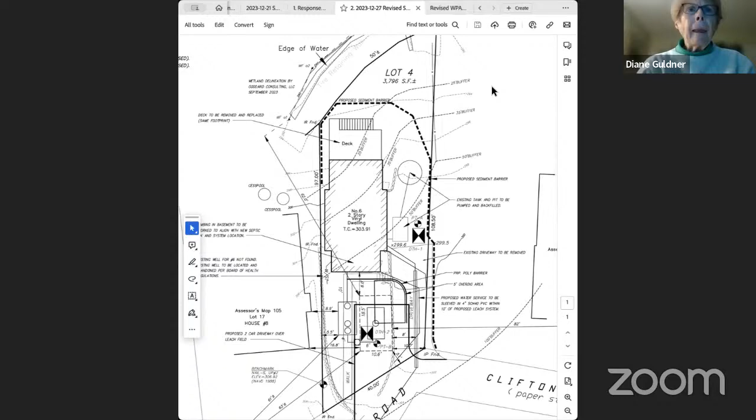Perfect. Okay, can everyone see the site plan on my screen? Oh, that's okay, a little bit big. Can you make it a little bit bigger? Yeah, that's bigger, that's big. Sorry, I'm trying to zoom back out, but I think my computer is, oh, there we go. Is that okay? I guess, yeah, we can live with that. Sorry, so I can kind of zoom in as I'm talking maybe.

So just to go over the proposed work, there's an existing deck in the back with a patio that extends about halfway underneath the deck that the applicant's requesting to replace all within the existing footprint, as well as get rid of the old, failed septic system and put a new one in the front. And then redo the driveway slightly.

So the existing driveway, if everyone can see my mouse, comes up along the property line here, over and down. They want to move it over to this bold line as they come up, over and down, just to create more parking space. This area will be converted back into lawn. And then some house renovations, but all within the existing footprint, exterior and interior stuff.

So the applicant requests an order of condition for the proposed work for the deck, the septic system, and the driveway and the house renovations.

Zoe, where's the driveway going to go? Is that right by the septic system? Yep, it's going to go right on top of it. So if you follow my mouse, I know it's hard to see, I thought I had a colored one, but it's this bold line that comes up, crosses over and down. Okay, yep.

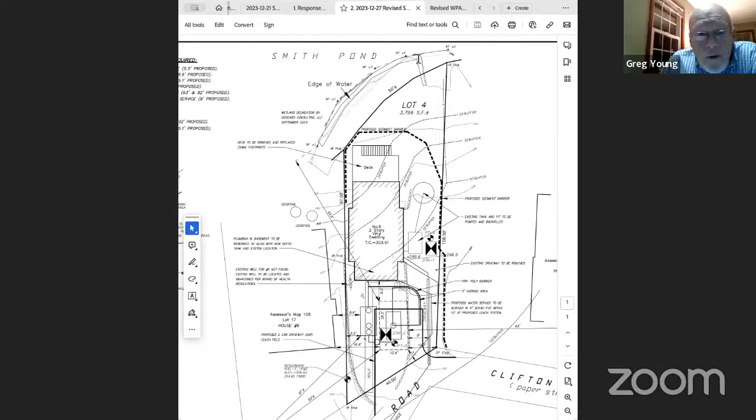Well, if I remember, the tires come back more than the edge of the water, Vinny. Those tires come back, there's a little gate down there, there's a little pathway down to a gate. Yeah, so it cuts in. I wonder if it's this, if you can see my mouse. I see it. I wonder if it's this icon, this drawing here, it does kind of turn up and along the side of that path.

I'm happy to pull up pictures if you'd like, I have some. Just to add in, I think that double line there is showing the tires, that's the actual line I assume Vito the engineer did for the tires. That's what I'm thinking too. Yeah, so that pretty much appropriately represents the extent of the tires.

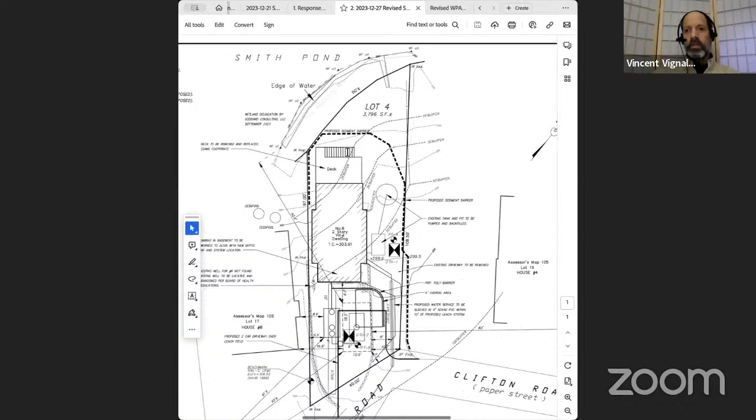There's a little chain link fence at the top of the tire wall, I think on the south side, I don't see the north arrow on here, but kind of the left side. Yeah, the southwest end, there is a chain link fence out there. And I know the plan shows the property line right there, so I wasn't sure at the last meeting, that was another question that came up. So I did a little research myself and checked the deed, and the deed says the property line goes to the edge of water.

So it appears to me that the line on the drawing is incorrect, and it should extend all the way to the edge of water, unless the edge of water has changed that much.

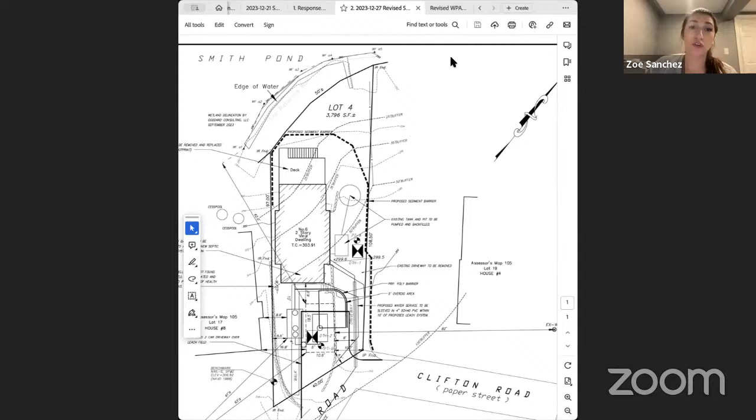Which would you mind pulling up that deed? Because I also read a deed earlier and I actually didn't see that. Maybe I missed it. I don't have it here, but I know I pulled it up. It's referenced in the assessor information, so I just went to that deed reference.

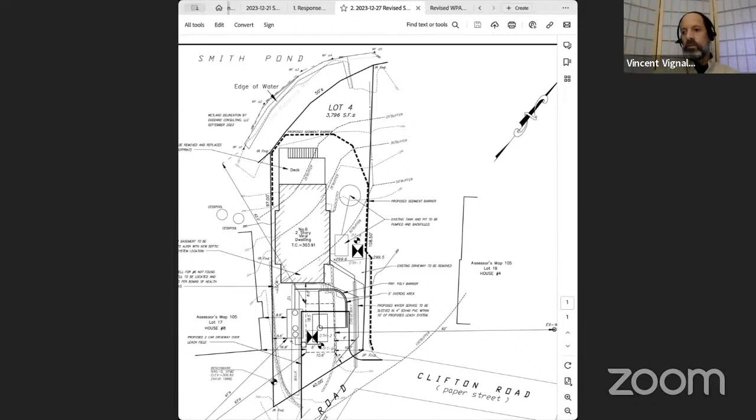Vinny, while you're doing that, here's a question too, Zoe. Do we know for sure that the tires are not further into the lot? Have we done any sort of soil testing, drilling down? Because I think the tires might be a little bit further back than just the retaining wall.

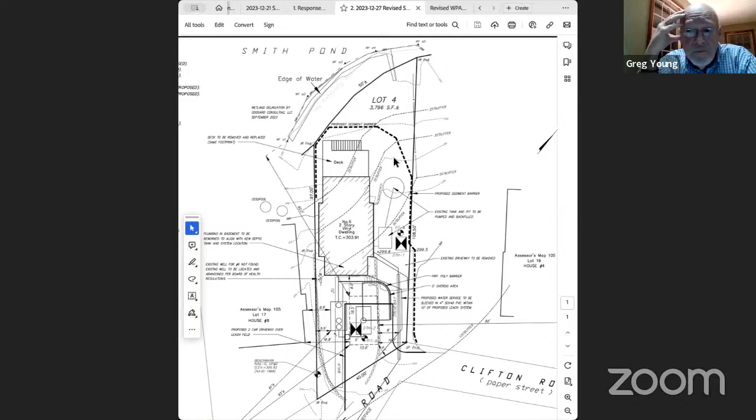I didn't do soil tests while I was out there, but I can pull up some pictures if it's helpful.

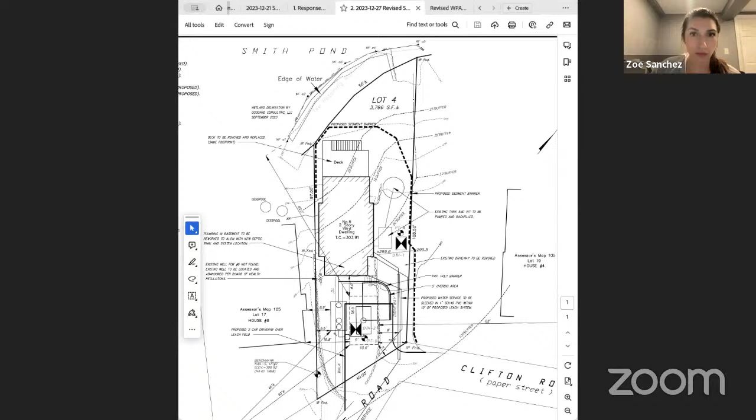Yes. All right, so this is what I saw when I was out there. So it's right along, basically right along the edge of the pond, a little bit, a couple feet in front of it. Kind of swings around, goes down over here, and then that's when it cuts in where that path is, like if you wanted to access the water.

But I've got a little sketch and some photos if you want me to share. Sure. It's coming.

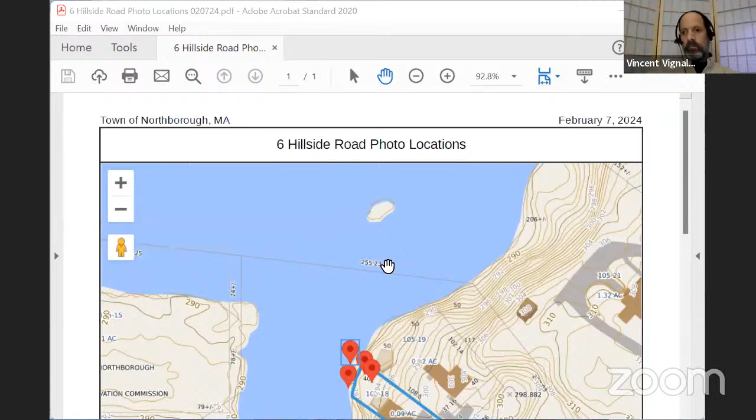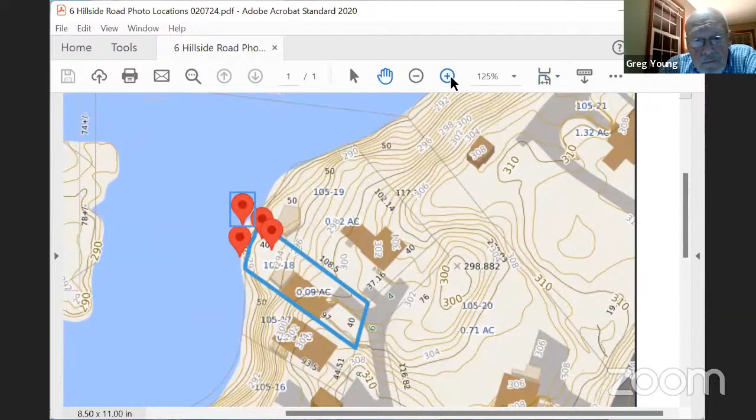So this is that same lot, and the pictures that are taken here, and around this side there. So now I'll try to get to the pictures. Got to go get them from the file at the office, so it takes a minute or two.

All right, so this is a picture. This is the, okay, what does it say? The north side. I think the gate is behind you here. It's behind us, yes. This is right where that gate comes down.

And you can see, I think my pointer is visible. You've got 1, 2, 3, and 4 layers. So you've got the pond level here, and then the tires are sitting just like that.

And then should be able to, okay. So the next photo is taken back a little bit with the gate, that there was an access road that's on the plan that shows going down in the upper right corner, goes down here, and then the tires kind of come around here and loop back along that ramp.

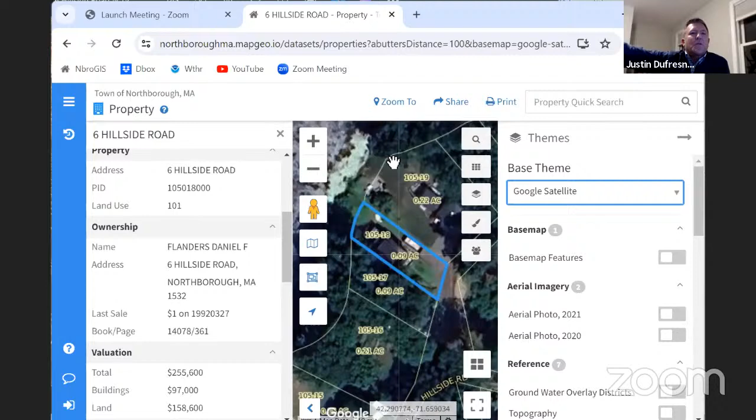Obviously there's a kind of man-made sluiceway over by Otis Street that allows the water to get through and down to the stream down there. There's man-made structures and things like that associated with it. I just don't know, would tires be any dirtier or worse to have there than something like that too? Yeah, I think that'd be something worth the applicant looking into.

Through the chair, if I may. Sure.

Thank you. So I just want to thank everyone, I really appreciate the comments. And I guess if more research is requested for this, it's up to the applicant to look into it. But I think at this time, looking at the overall project proposed through this notice of intent—overall improvement, redoing the septic system, the driveway, parts of the house and the back deck—overall it's a pretty simple, straightforward project. I would hate for this to bog down the main purpose of the project.

Maybe this could be treated as its own separate thing, where we can take care of what is proposed here and now. Then we can work with the applicant to encourage him to let us look into this for him and provide our help, and come forward maybe in the future to do something with this if necessary. I do want to mention that when DEP issued the file number, there were no comments left on that, so I don't have much information on exactly what they're saying. So yes, of course more research could be done on this. But again, I just want to reiterate that we're looking to focus on the proposed project and hopefully see an overall improvement on the site with what we have in front of us.

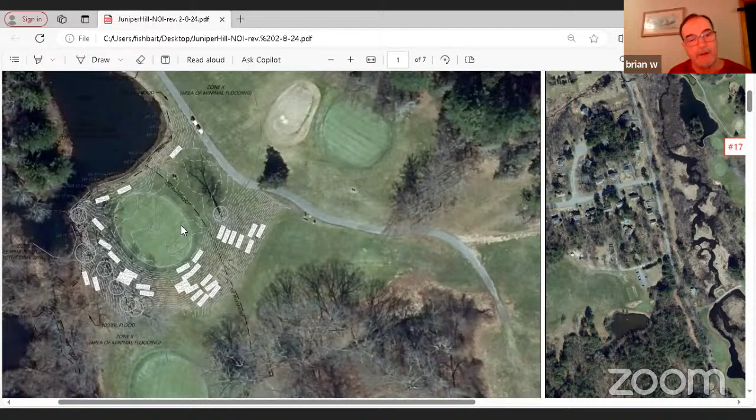And then this is the fairway going over to number 17. You have the pond here, so we have a wetland area here. This is a steep slope that drops down to the green. And then we have the mean annual high water for the Assabet here, so this project's riverfront here is protected over this ridge here. So there's really, we're in the riverfront, but this goes uphill 15 to 20 feet. So that's the overall area. Let me see if I can knock this down a little bit for you.

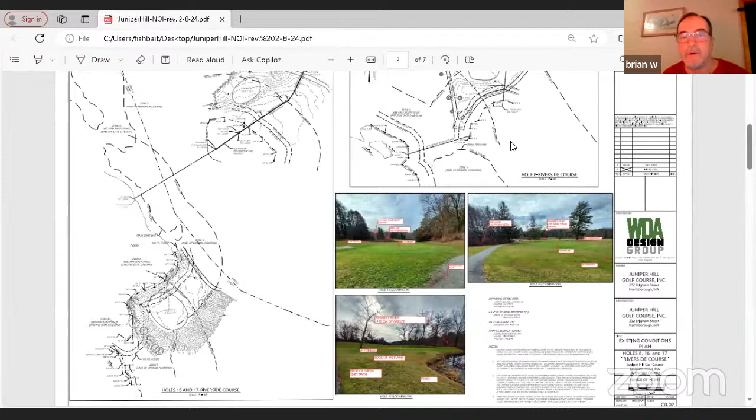So let's see, here's number 8 without the aerial, so it might be a little clearer. This is based on our field survey and some record plans, some of the record drainage that's already out on this hole.

Here's that 18-inch pipe that goes between this wetland. You can see the existing cart paths, sand trap, sprinkler heads. This green was put in 1930 and has no sub-drainage, and just the way it's graded, you'll get some natural runoff here and it ponds up in front of the green. The grass needs to be redone.

So they're proposing to redo this green, add some sub-drainage to tie into this existing drain line, reshape the green a bit. They're going to put it back to existing grade, so there's no change to bordering land subject to flooding.

This entire area is within the mapped 100-year flood. It's unstudied, there's not a set elevation, it's the amoeba if you will. But they are going back to existing grades, so there's no fill coming in here. We're not changing the bordering land subject to flooding or losing any storage.

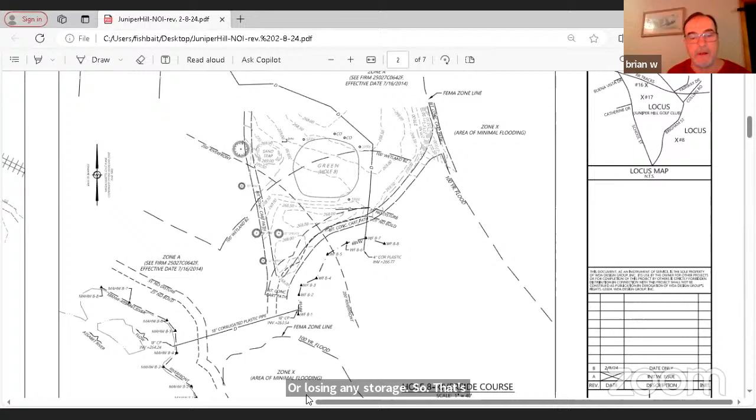So that's generally number 8. Let's see if I can get over here to 16 and 17. Can everyone see that? Yes. So you have the existing railroad tracks.

There's a historic drain line that runs through this fairway in front of 16, cuts through the wetland, and then comes out to the pond over here. This has an existing 8 and 4-inch drain that comes into this catch basin. Then within the catch basin, there's a 24-inch corrugated metal pipe that connects to the next catch basin and runs out to here.

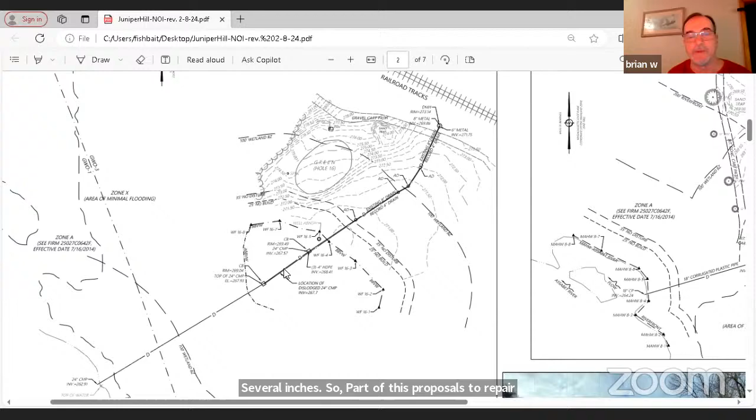We did identify there's a dislodged section of the 24-inch pipe here, where a joint was put together and it's come apart several inches. So part of this proposal is to repair that joint. If you're out there, you do have flow going through it, but there is a breach in the top where it just needs to be repaired.

So to give you an idea of what we have on this hole, let me see if I can... oops. So this is number 8. This is that wetland in the area here, this is one of the cart paths. The Assabet River is back here, about 212 feet away. This is the green complex number 8, the sand trap over here in the fairway.

So the work is to strip this, stockpile the sod, trench, put in your drain system and tie it into that existing drain, and then put it back to the same grade.

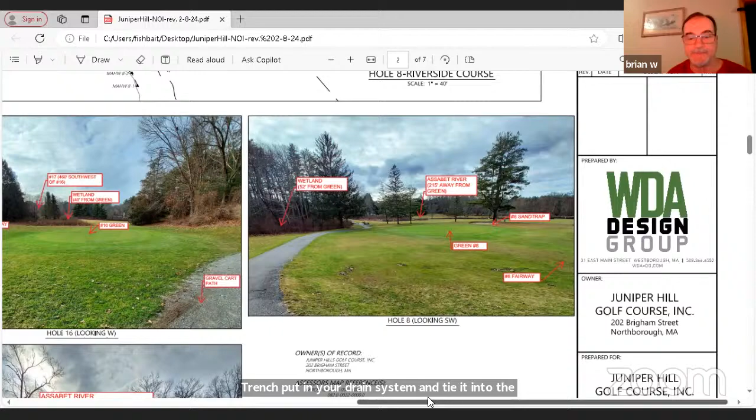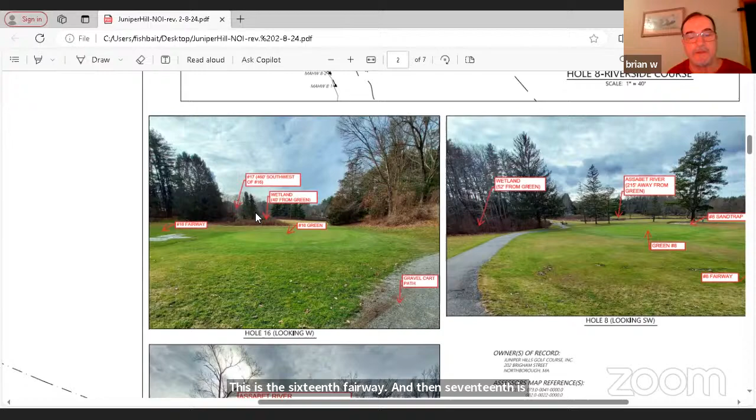Over here, this is the 16th green, existing gravel cart path. That wetland with the 24-inch culvert and catch basins is right here. This is the 16th fairway. And then the 17th, as you saw in that overall fairway, is about 450, 60 feet from this area. And then this is number 17. We have the pond on this edge, so we have the wetland along here. The riverfront, the mean high water, is on the backside, 115 feet away. And you can see the hillside here that protects it between the river and here.

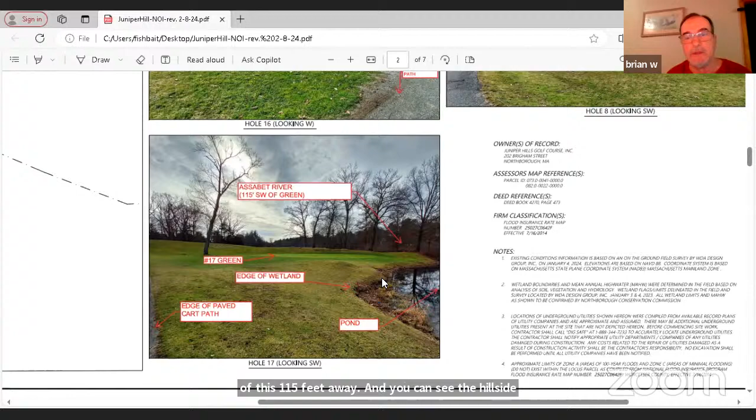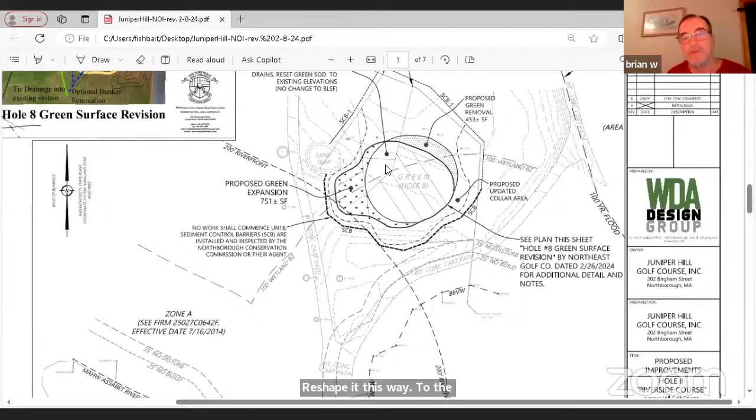Yeah, I might have to reduce this down. So this is number 8. They're proposing to remove about 450 square feet of the front part of the green just because of the drainage issues, the way it's graded in here. Reshape it this way to the same elevation, add in these new sub drains, and tie it into the existing main line here.

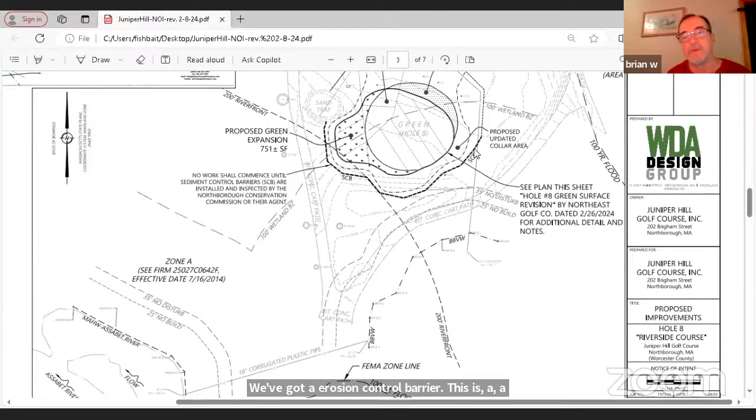We've got erosion control barrier, this is straw wattle with entrenched silt fence for sediment control. And then around the perimeter we just did a silt fence. This is flat, allowing them to get in here and close it off.

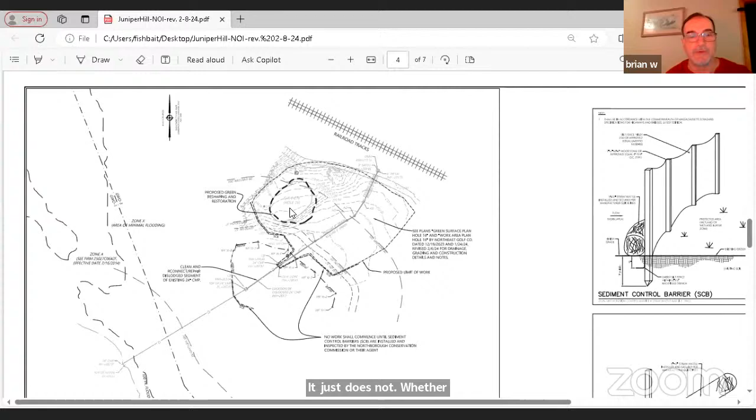Then on 16, you have the existing green here, so that would be reshaped, fixing some of the drainage here and adding a new soil complex and grass just so this can be maintained. It just does not weather well. This green was 1950, I believe, and green 17 was 1970.

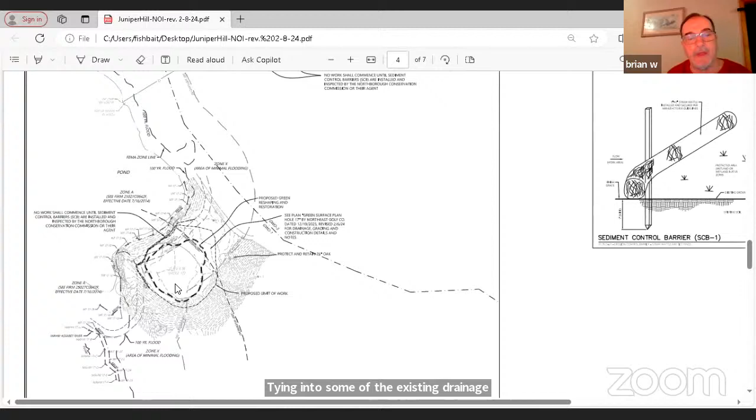So again, this would be improving drainage around it, tying into some of the existing drainage here, and then resodding this with the new soil complex, so it allows for future viability for the greens.

The Northeast Golf Company and the golf course architect Robert McNeil have much more detailed plans on some of the grading, showing how the soil and sod complex would be for the green and the proposed subdrain here. So these plans just detail the minute grading done for the green with the drainage improvements.

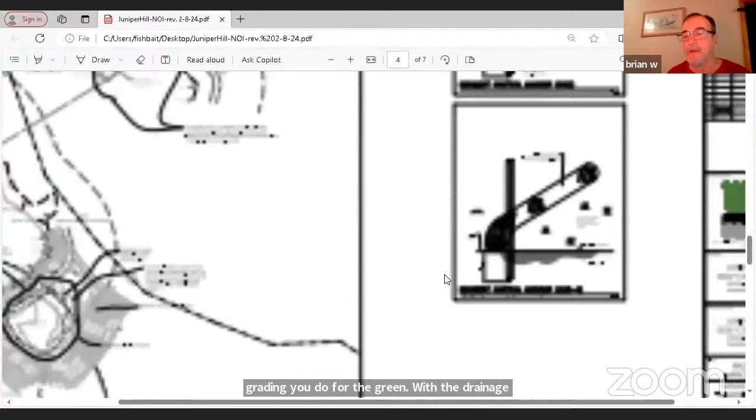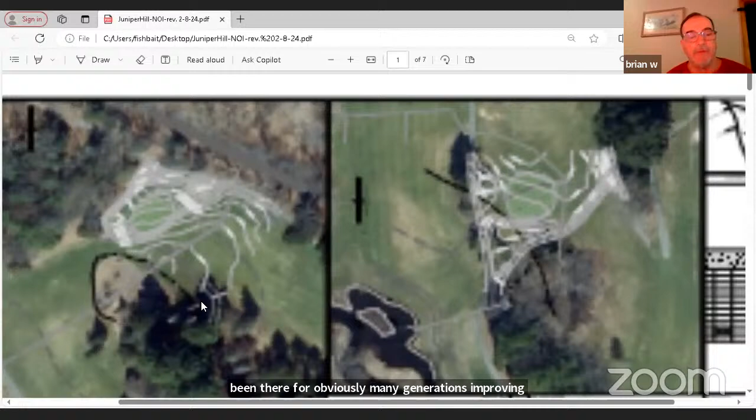So it's really work on greens that have been there for obviously many generations, improving some of the drainage, repairing that one separation on the 24-inch pipe, which is general maintenance.

Everything has erosion control barriers. Vincent had some comments and we've addressed those. He had also suggested we put in for a waiver on number 8 for work in the BLSF. So we submitted the waiver request that we will be working the BLSF, but we're not altering the grades as such to lose any flood storage, potential flood storage.

Dudley, you can chime in, but I think they're trying to do this work in the March through September period, working it around some of the course and contractor. But it should be fairly quick work once they can get in there and do it.

Dudley, do you want to add anything, or I'll turn it over to the commission and Vincent for comments? Basically, on the 16th, the water coming in on the right side of the fairway comes underneath the railroad track. So that's a donation from our neighbor, apparently. And with the weather we've had in the last year, it's been kind of untenable trying to keep the area mowed.

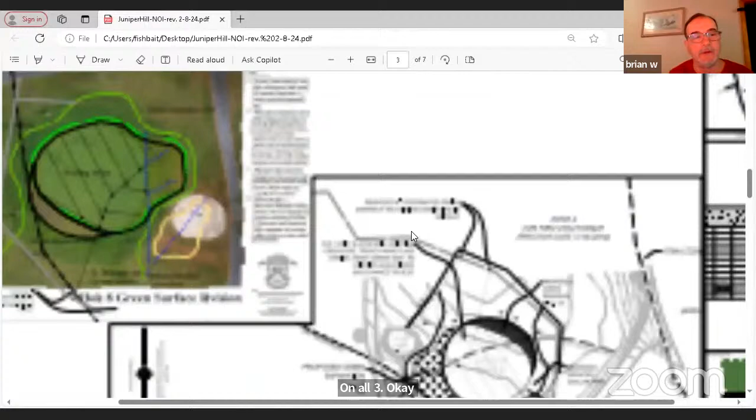Yeah, I'll take you down to the architect's plan on 16, 17. Let that clear up a little bit. We had gotten an RDA on drainage on 1, 8, and 9 in 2022. So that covered drainage on the fairway side of the 8th green and improved the drainage there, but had not covered any of the drainage underneath the 8th green.

I don't know if you guys can see this, but you can see these new blue dashed lines tying into the main solid blue line there. So you've got the dashes under the green, and then this low section of the fairway, which is getting some of this additional drainage from under the tracks collecting here. There are existing pipes in here, but they're just not adequate for the water coming through. So that'll be cleaned up and tied into this existing line. And then when the green surface is redone, you can see the new dashed lines under the green here. That'll all tie back out to this main line.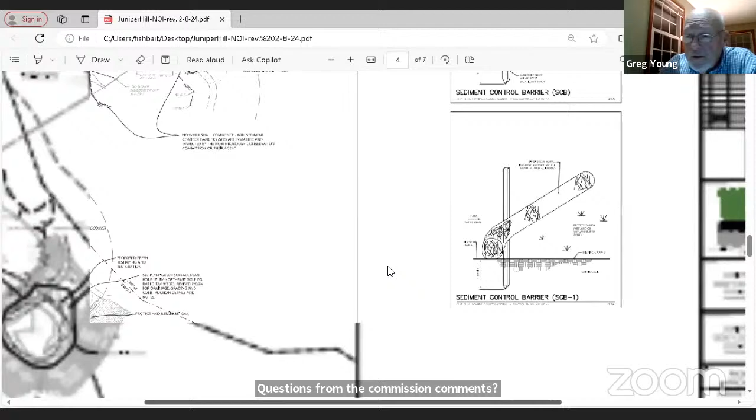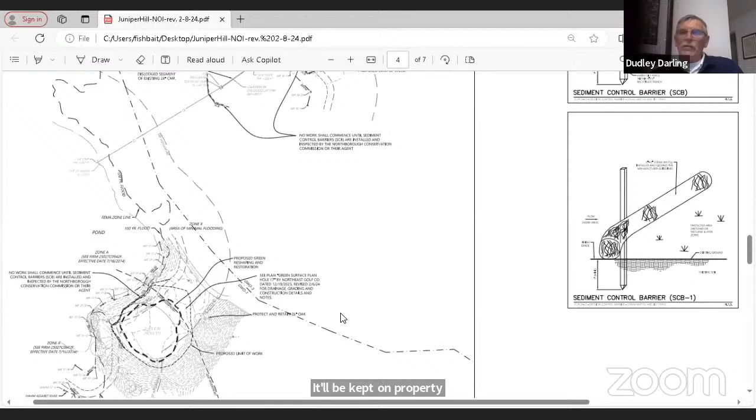I think you said you're digging out and replacing the soil at 16 and 17. What's the fate of that material? Are you trucking it away? What are you doing with it all? It'll be kept on property. Some of that will be amended with sand and soil and peat mix and used in front of the 16th green. The rest of it will be kept on property.

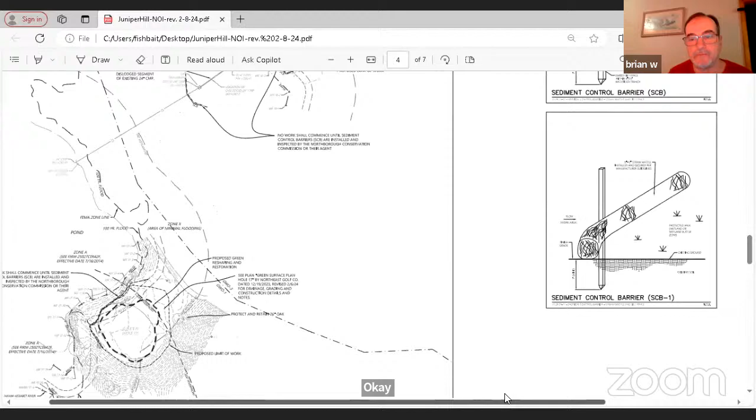Anything else? 16th. Vinny, how are you in this one? Oh, you're muted, Vin. You're muted. There you go. Yes, Brian has addressed the questions that I had.

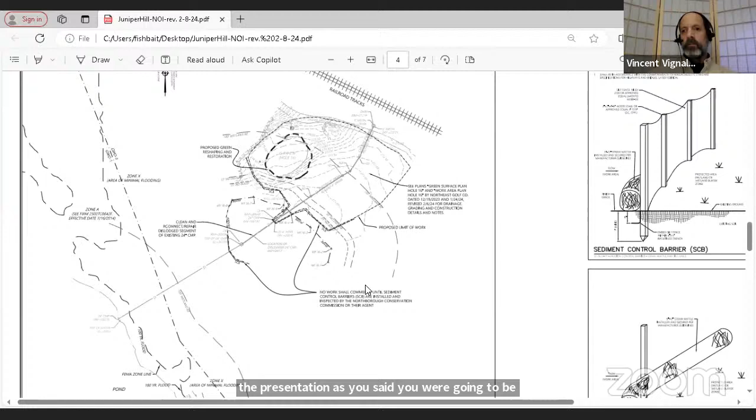The only question that came to mind during the presentation is you said you were going to be replacing or adding new under drains. Are you going to be trenching those in, or pulling the line through? On number 8, they would just strip the sod, stockpile that, and trench these in. They're 4-inch drains, so they trench it, do their stonework, do the soil, and then replace the sod on the green.

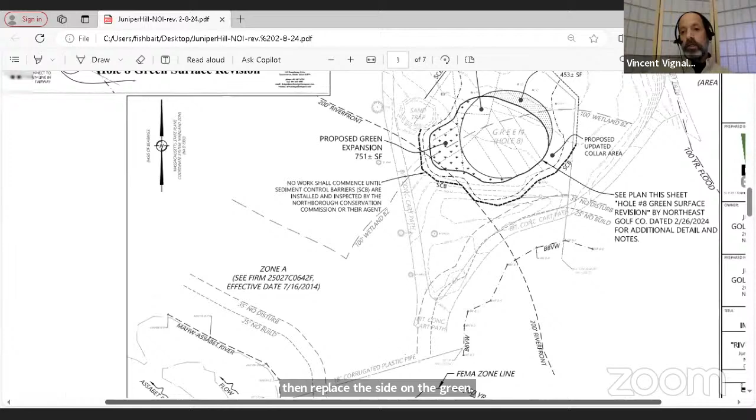Yeah, I believe those are good, I like those. In the area that was outside your sediment control barrier, in one of the fairways, I think it was the 17th, maybe — you said you were doing drainage out on a fairway and replacing some lines. Oh, that's on 16 here.

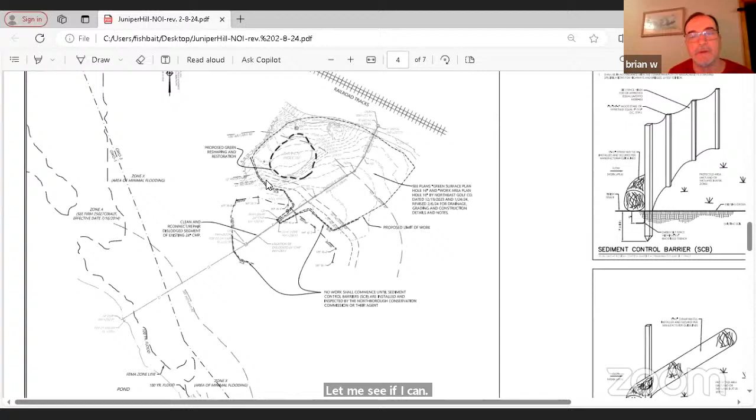That was one thing I asked about—making sure you had sediment control around the work area. Yeah, we've got it. This is all new sediment control.

That's around right here. We extended it up here. You can see the grades—everything's flowing this way. So we ran it up to intercept this contour so that anything that potentially runs off is contained in this area.

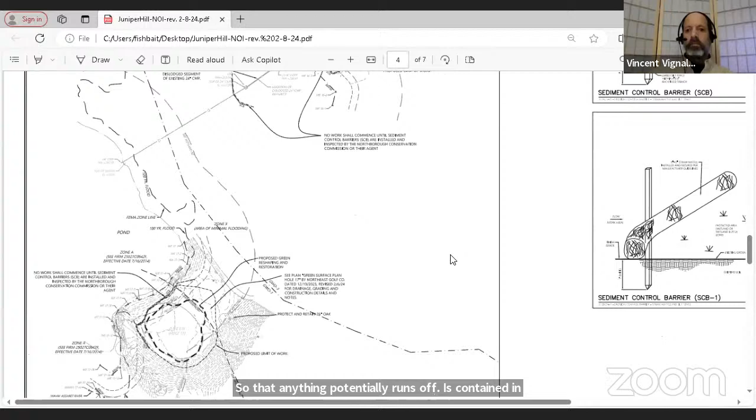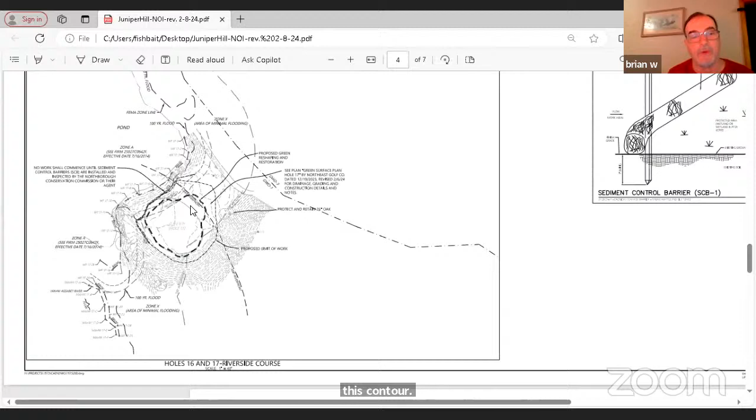Same thing here—we extended this a little bit to bring it up to this contour, so it surrounds the limit of work where anything could potentially run off, since everything is flowing this way. We've got it on this side, and this is all upslope, so it's just on the downhill side—it doesn't totally surround it. We don't need it at the top of the hill, only downhill.

It was surrounded on 8 with the flood zone, and we extended that around. We kept the double row with the straw wattle.

This one—so we did the straw wattle with the entrenched silt fence on this side, which is the slope here. Out here it's flat, but we ran that around with silt fence so they can just get in and out of it easy. It's so flat right here, and this isn't going anywhere.

And we ran it outside where it'll tie into this existing line, so you'll have protection there as well. Yep, that's good—you want to enclose that because that's where it floods, so the water can come from any side.

We added a note here that no work until the barriers are in and they're inspected by you or members of the commission.

So this is, I guess you said, a 6 or 7 month effort from March until September—well, not the entire time. Dudley can clarify, but no, the work won't take 6 months on each green. They may do 16 and 17 first, and then 8 towards September. Is that correct, Dudley? Yes, yeah.

The contractor we were working with originally was booked two years out. He had a window of opportunity to do it late February or March, but we still have frozen ground in spots where he'd be working. So he's going to try to do it in conjunction with another project—he's working on the country club. Then on number 8, if he has time, we'll have him do that. Otherwise we'll try to do it in-house later on.

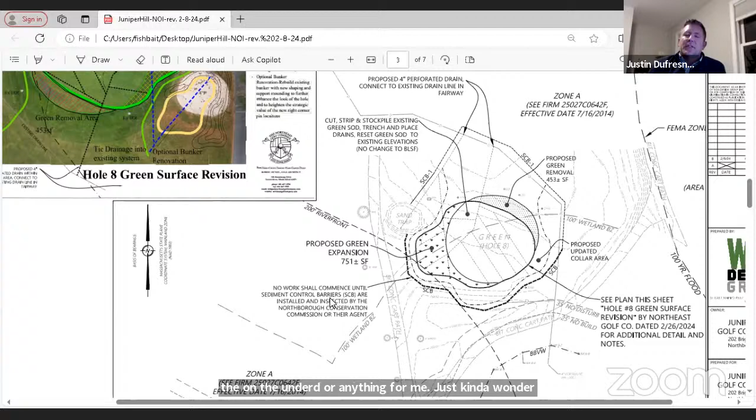Just wondering, Brian—you said they have to get into that wetland to repair that pipe. So what's the plan over there? Do you mat it to get a piece of equipment in so you're not mucking it all up, or what does it look like over there?

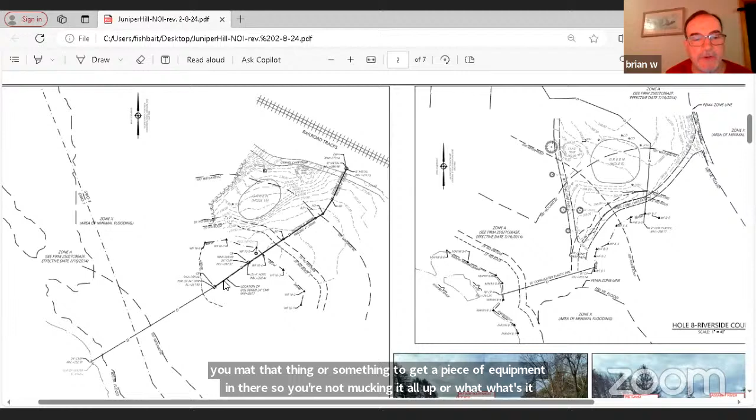I don't know if I have a picture—we got pictures of the pipe. I'll have to send those to Vincent if I didn't already. Let me try to zoom into this, Justin.

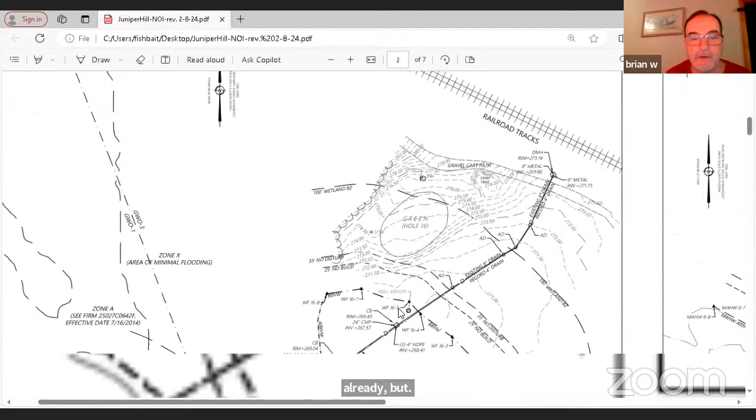So the break—we surveyed and located it, it's right here, and it's literally probably an inch or two where the two sections were joined.

Looking at the photo, our hope is—and it looks like, because the top of the pipe is about an inch or two out of the soil—that you can just hand dig around it and join the pipes, or add some kind of a rubber seal around it.

So our thought and hope is that it can just all be done by hand while the soils are dormant. Good, and then in the spring when it grows, you won't even know you were there. But if we had to get in a machine, you'd have to do some kind of corduroy bridge like the utility companies use or something. But our hope and goal is that that's not the case.

If it's not very deep, if it's right there near the surface, hopefully they could just pick away, get to it, and get a coupling on it. That's our hope, and it looks like it's doable. But I can send Vincent some pictures if he wants to forward them to you guys, just so you can see exactly what you're talking about.

Should have brought one of those up. But yeah, it's a 24-inch corrugated metal pipe. It just separated in that location about an inch or two. So hopefully it can just be all handwork.

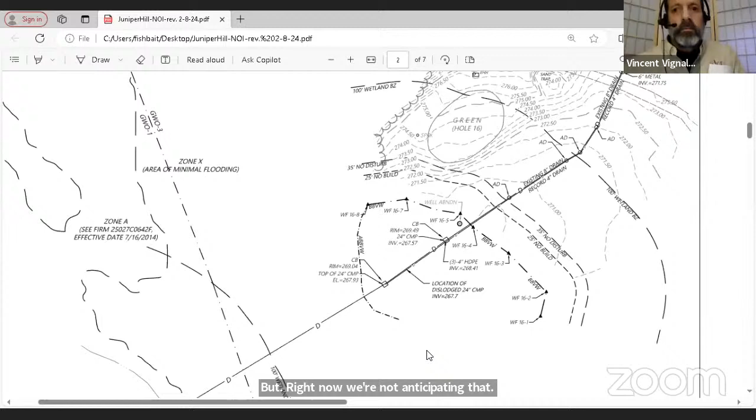I can include that as one of the conditions. You all set, Justin? You good? Yep, thank you. Anybody else? Let's see if we have any public attendees. No hands up.

Vinny, any special conditions you see here other than what you just mentioned? No, we'd pull out the standard conditions, but I don't know that we want to mark off the 35-foot no disturb zone on this one, so I don't think we'll need signs or boulders out there.

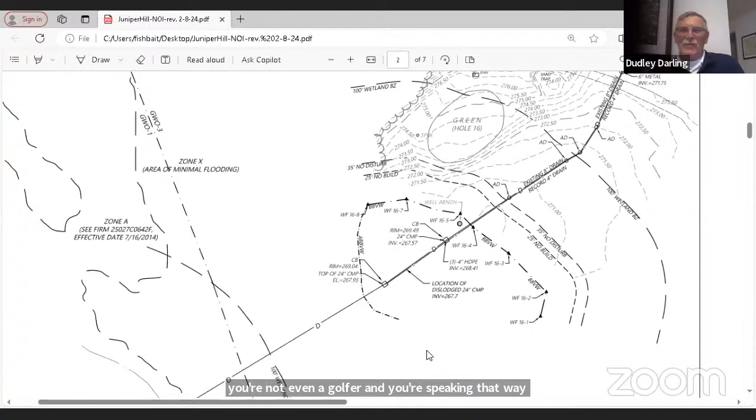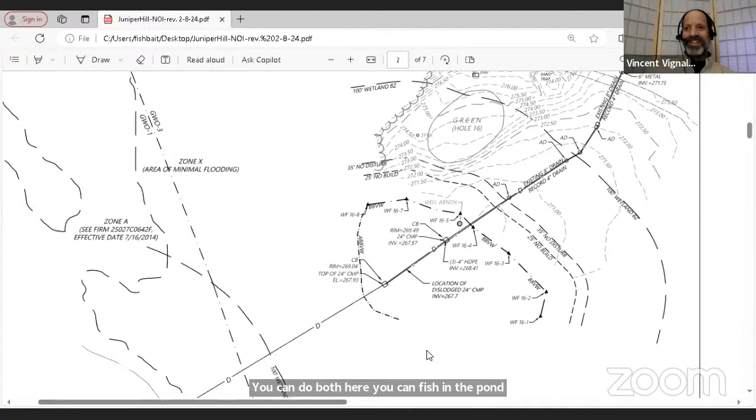There's enough trouble for you golfers out there already. And you're not even a golfer and you're speaking that way. Yeah, not all those stories are true. Okay, don't torture yourself, Vincent. Yeah, that's right, I'll stick to fishing. There you go. Well, that's torture enough. Trust me, you can do both here. You can fish in the pond at 17. I've seen fish in there before. For your balls, right? Yeah, well, another story.

All right, good. So if we have no other questions, comments, or concerns, I think we can move to close the hearing. Is there a motion to close the hearing on 202 Brigham Street? So move, by Diane. Is there a second? Second by Dan. Roll call. Dan Clark, yes. Justin Dufresne, yes. Diane Goldner, yes. And I vote yes.

We now need to issue an order of conditions for 202 Brigham Street with the special conditions as mentioned, I think, with prep work for the digging process between 16 and 17. Yeah, the 24-inch pipe between 16 and 17. So moved, motion made by Dan. Is there a second? Second, seconded by Diane. Roll call. Dan Clark, yes. Justin Dufresne, yes. Diane Goldner, yes. And I vote yes.

You're all set, all right. Thank you very much, everyone. Thank you. Good luck. Good night, good luck in the storm tomorrow. Yeah, right, same to you. All right, take care.

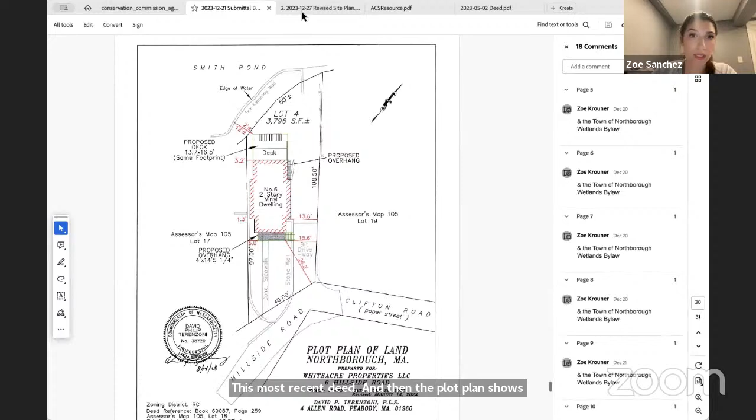And then this is the other deed. It says pretty much the same thing as the most recent deed. And then this is the plot plan that matches up with this most recent deed by book and page number. The plot plan shows those property lines at 50 feet from the edge of the pond. And then the revised plan from Cornerstone took that plot plan information onto this one.

So I would say, Zoe, I've worked in surveying for years, so I would get the surveyor to just take a look at this and certify it. Basically what it says to me is usually when it says by Smith Pond, it means along the pond for 50 feet. It's not saying that it's 50 feet away from the pond. It's saying that the length approximately between that iron rod found at that corner and the iron rod at the other corner is about 50 feet in length along the pond.

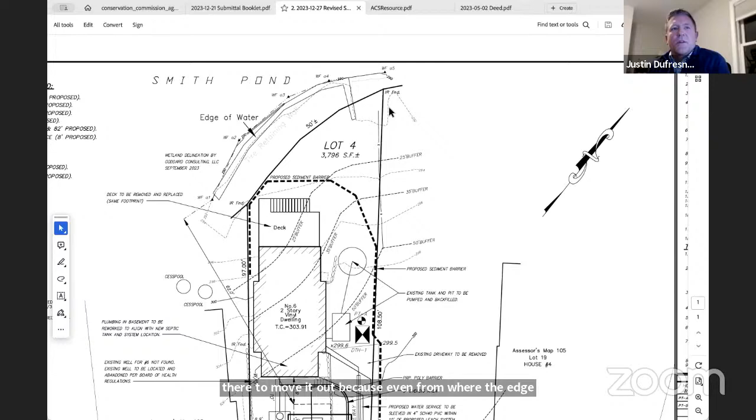So that's probably where the prior edge of water used to be, where that 50-foot dimension is, before they constructed the tires and put a little fill in there to move it out. Even from where the edge of water is now to that line is probably only 10 feet, based on your 25-foot buffer zone. So it's not saying that's 50 feet away from the pond, it's saying it's 50 feet along the pond. That's how I read it. Basically, walk west 50 feet along the pond. Yeah, that's how I read it.

And the pond has moved over these years. Yeah, we see this a lot. I've seen a lot of old deeds, especially along ponds and streams. We see them a lot on streams, along the edge of the stream. It doesn't always fall right where that is, because certainly it varies over time.

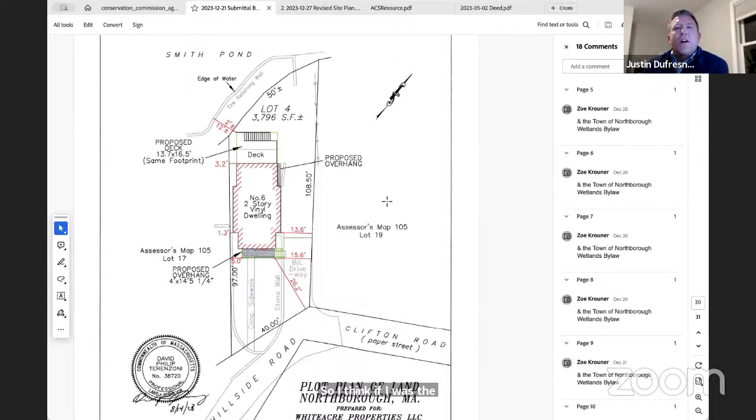So I think if I was the surveyor here, I would look at those iron rods they found as probably the most important thing, because your deed reference between those iron rods, if it calls for certain lengths like 108.5 feet or 97 feet exactly, and if they found rods there and those distances match, then those are pretty good indications of your property corners. And what happens along the pond fluctuates over time, but those corners might be right.

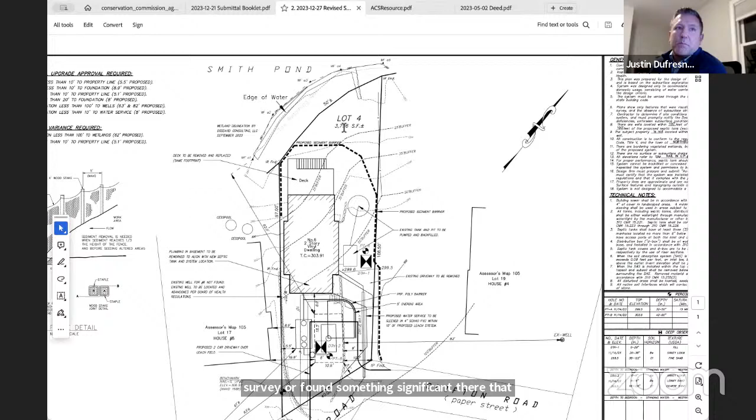And that's where, when it says iron rod found at each one of those corners, that tells me the surveyor found something significant there that matches the deed. That leads me to think that based on those iron rods, those tires may very well not be on the property, based on the way the property is described. So I think it's going to need a surveyor's interpretation, but it would be good for them to really dig into that and certify exactly where that line is.

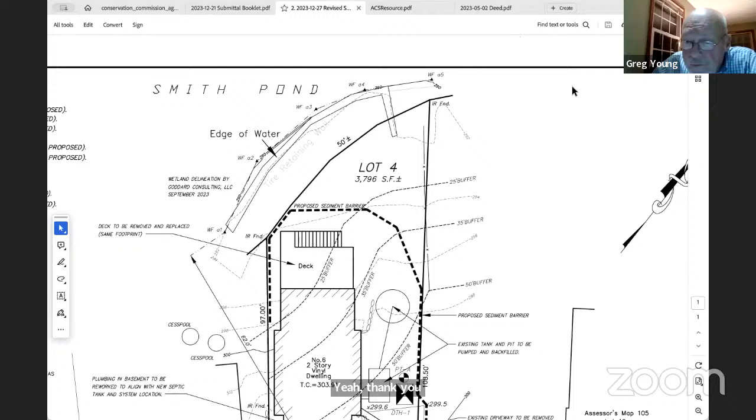Yeah, thank you. You okay, Zoe? Yeah, thank you for that. I appreciate it. Okay, thank you. All right.

That I think is the end of the... no, 0 Hudson Street. 0 Hudson Street.

Thank you very much, they've requested a continuance. Yes. Yeah, they have no DEP number, that's true too. We need a motion to continue 0 Hudson Street to March 11th. So moved. Second on that one? Second by Justin. Roll call. Dan Clark, yes. Justin Dufresne, yes. Diane Goldner, yes. I vote yes. Continued, okay. No COCs, no violations.

Yeah, at some point in time on the violations side, Vinny, we should probably talk about the patio and smoker at 4 Hillside Road. Yes, but we don't have to do it now. Yeah, that actually looks like it has occurred in the last 5 years, so that'll be an interesting one to talk about. Yeah, we'll take some photos and bring those to next month's meeting. Okay, just something to look forward to.

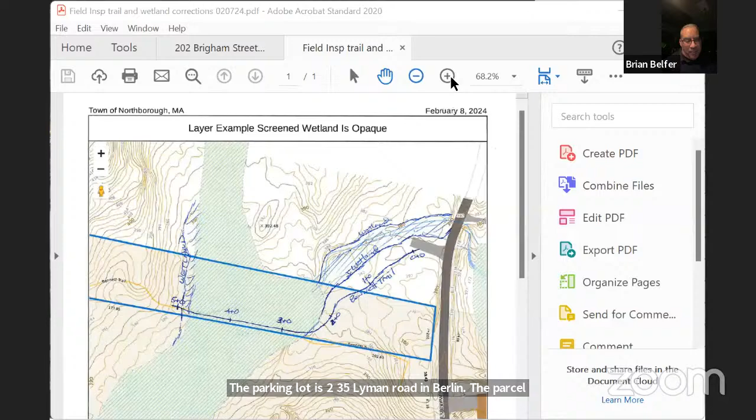There's 10 old 2-foot by 12-foot long footbridges, some of which are in moderate shape, some of which are completely destroyed, all of which are too short and too slippery. Basically that whole entrance to Pisgah has been neglected. We probably should have done this project 3 years ago.

So what I'm proposing to do is to replace all of those bridges, but reuse almost all of them. Basically one by one, if you want me to read through this, or I could do the summary. But we're going to make proper bridges that are both taller and a little bit wider to get up out of the creek to let the water flow. So the whole first half basically covers bridge replacements.

Everything's going to be a little longer, a little wider, a little taller, with ramps so that people can get up and down without giant steps. There's a couple areas of the trail that are super eroded, it's all rooty adjacent to the rock wall. We've had good luck just dropping crushed bluestone to level the path with the roots.

But I want to make sure that that's an acceptable thing to be dropping. Obviously it's just crushed bluestone, just introducing some stone. It's not changing the water flow, it's just basically getting the terrain up to the rooty level.